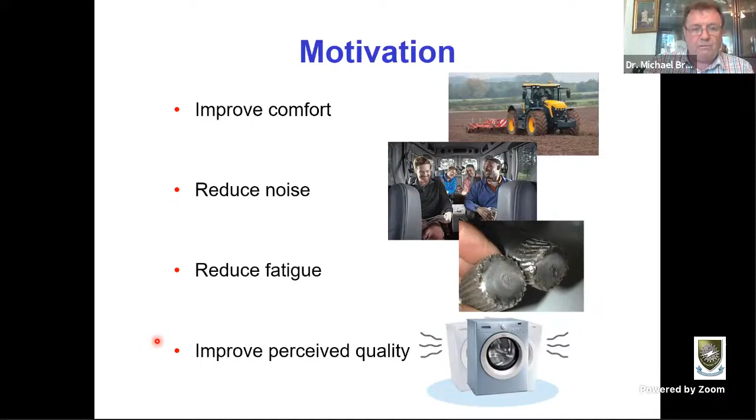So what am I going to do today? I'm going to give a very brief overview of some basics, and then I'll talk about ways to reduce vibration, and I will give examples as I go along.

Now, the best solution is to control the vibration at source, but this is not always possible, and for many, many years, this was never even undertaken. It has, however, now become a target for high-tech companies - for example, Rolls-Royce, the high-tech companies from Korea, and so on - they employ engineers now to get involved at the design stage to try to reduce the vibration at source.

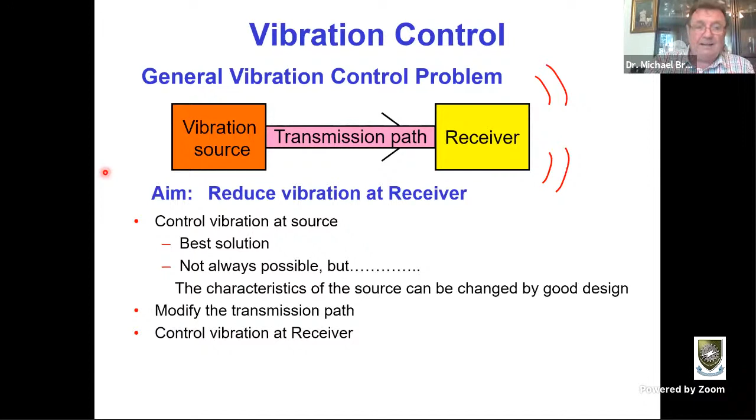By far the most popular method of controlling vibration is to control the transmission path, and you will all have seen examples of this, and I'll show you some in the coming slides. You could also try to control vibration at the receiver - that is sometimes done.

But what I'd like you to remember is that in all of these things, in general, the only thing that you can do is control the mass, the stiffness, and the damping - both the amount and the distribution of these three quantities. So the problem is quite easy to state, and in some sense, it's quite easy to state the solution.

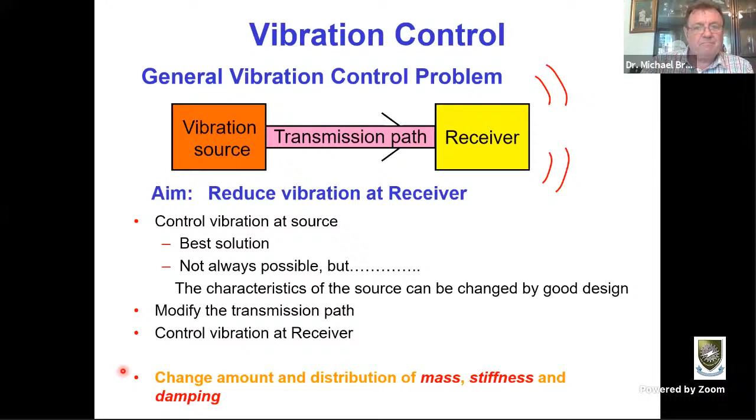However, it's very difficult to know how to change the mass, how to change the stiffness, and how to change the damping, and more importantly, when to change them. So let me just start off with some basics.

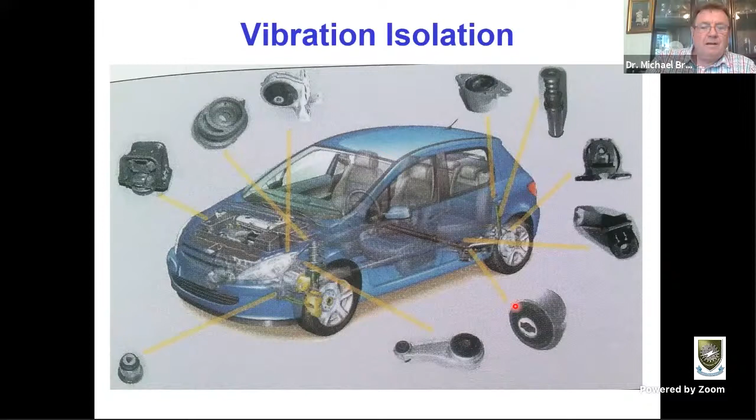I'll talk a little bit more about that, but in principle what we do with vibration isolation is interrupt this transmission path so that it's more difficult for the vibration to transmit through to the receiver.

Here is a picture of part of a car, and you'll be familiar with the suspension system, where you get these large coil springs. But what perhaps you're not so aware of is that all of these little joints are rubber bushes, designed to act as vibration isolators. So wherever you can in a mechanical system, it is always good to insert a resilient element between two stiff components in order to give some vibration isolation.

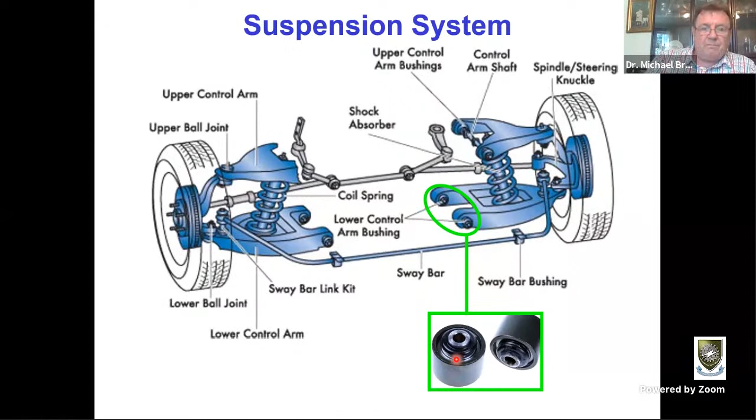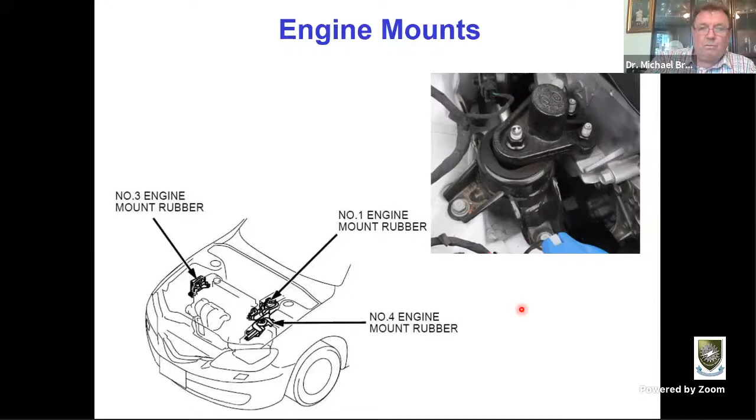The whole idea of this is to make sure that the engine and exhaust system are not rigidly connected to the car. In a sense, what you do with vibration isolation is let the source vibrate. You do not try to stop the source from vibrating, but you try to stop that vibration being transmitted to an important part, which in this case is the rest of the car.

So I just want to go through a really brief example here. There's a small amount of mathematics, but not very much.

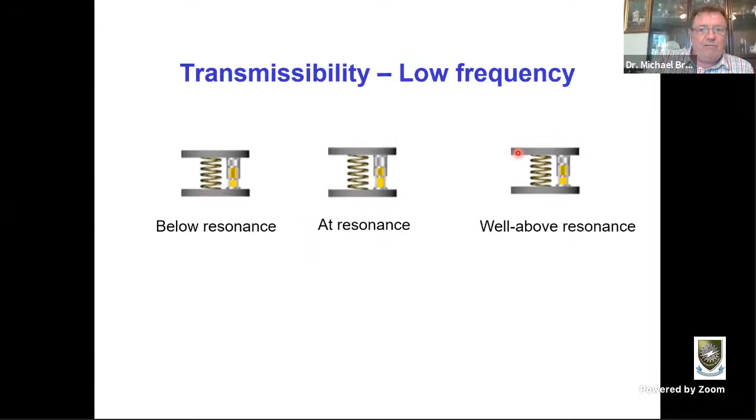Here you can see that the base moves a lot, but above the isolator it does not move very much at all. If we excite the system with random excitation, you can see you get a little bit of motion here, but you still get quite good vibration isolation.

Next time you're in a car, I suggest you look at a car or truck passing you, and if you look at its wheel and the body of the car, you will see that it behaves exactly like this.

So, some different isolator configurations.

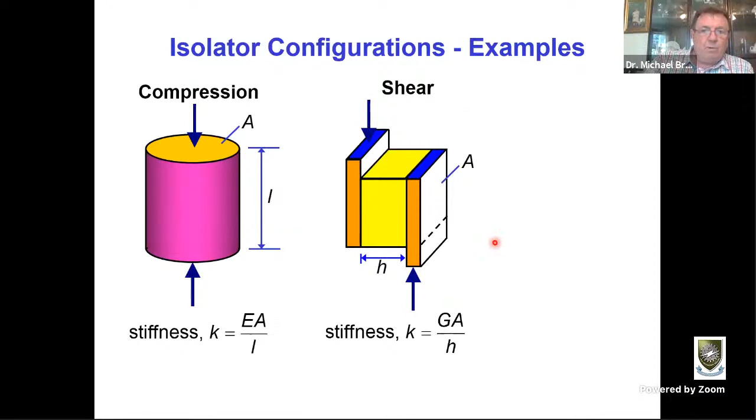But so often you find that they're configured in shear so that you can get more compact isolators. The shear stiffness is a function of the shear modulus, and the shear modulus is related to the Young's modulus through Poisson's ratio.

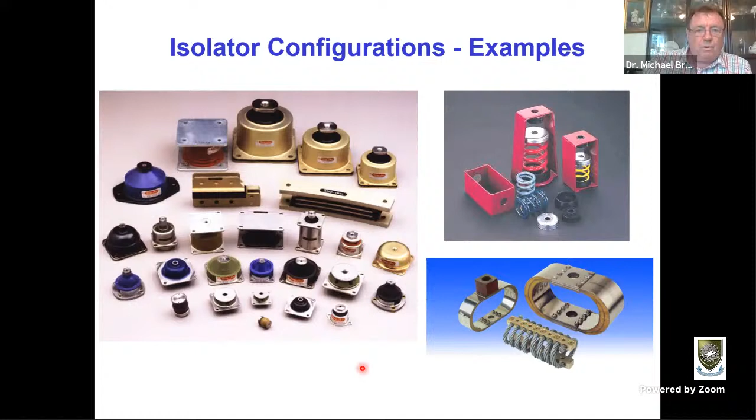So that's vibration isolation. That is one way of controlling vibration and disconnecting your source from your receiver. So let's turn now to a second way of controlling vibration, that using vibration absorbers.

Again, if I take a car as an example, if you were to look inside a car, you would find there are many vibration absorbers. Here are, in fact, 7 of them. There's one on the backrest, there's one on the steering wheel, there's some in the hydraulic system, there's some on brakes, they can be internal tubes, they can be torsional vibration absorbers and on the engine, and I'll talk about that a little bit more in detail.

And then in some advanced cars, you will get some quite sophisticated active vibration absorbers.

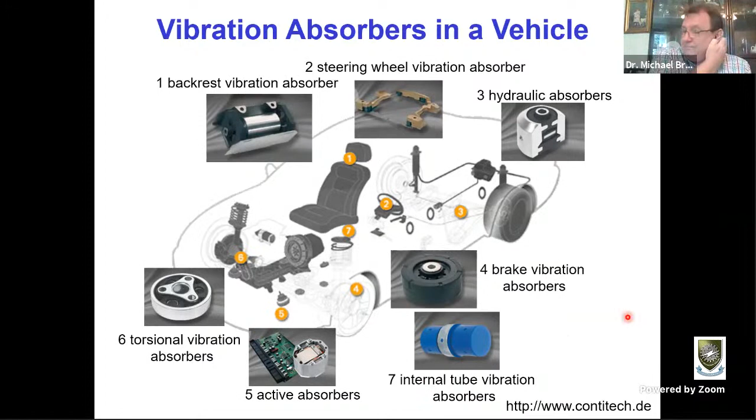Now we can tune this depending upon the properties of the system, so we can make this what they call a tuned vibration absorber. A lot of engineers will spend time designing these things to combat specific vibration problems.

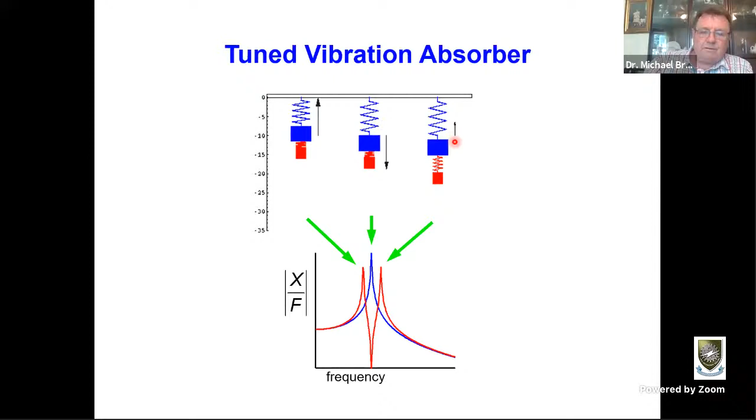There has to be a phase shift occurring between this natural frequency and this natural frequency. So when the phase shift occurs, it moves from being negative to being positive. It has to pass through zero. And this zero here is what we're looking for in a vibration absorber.

If we put some damping into the system now, we can no longer bring this mass to rest. The reason we can't do that is because the force acting on the mass is no longer equal and opposite to the excitation force. The damper destroys that phase relationship. And so we will get a certain amount of motion of our main system.

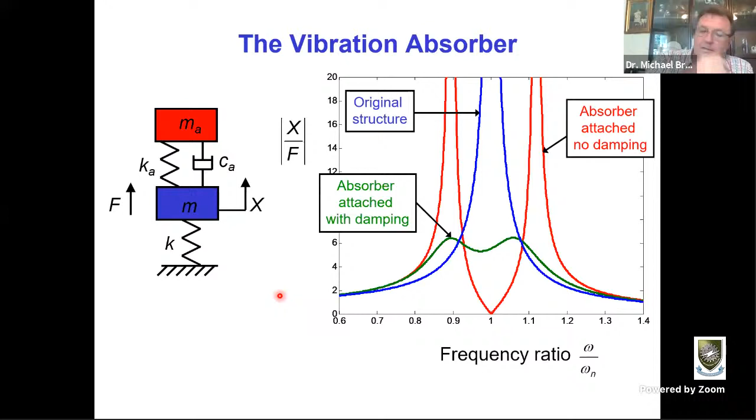Often with a vibration absorber, we're trying to get a fairly smooth but low frequency response rather than these large peaks that you get. So damping, in fact, is quite a good thing to have.

The very first vibration absorber appeared in 1910, slightly more than 100 years ago, and it was a device to stop the rocking motion of a ship. You can see here there's water, and the water passes through this valve here, and as the water moves backwards and forwards, if it's tuned correctly, it can suppress the rolling motion of the ship.

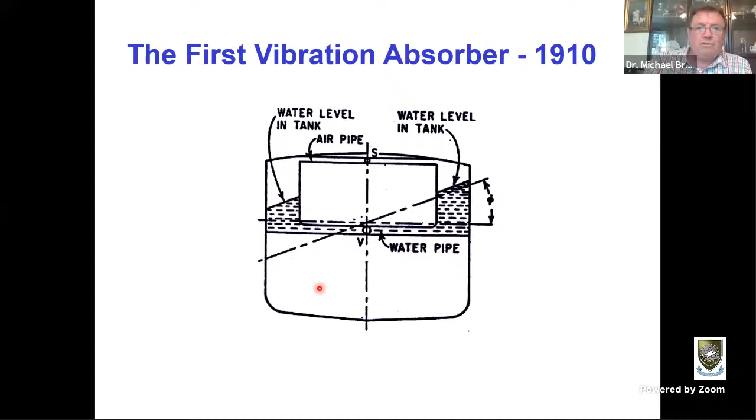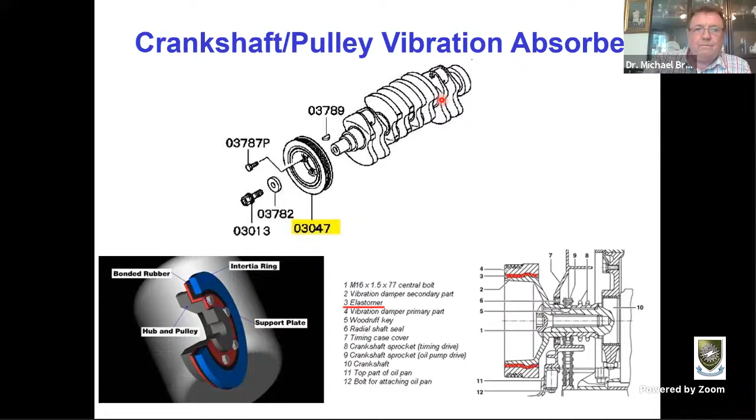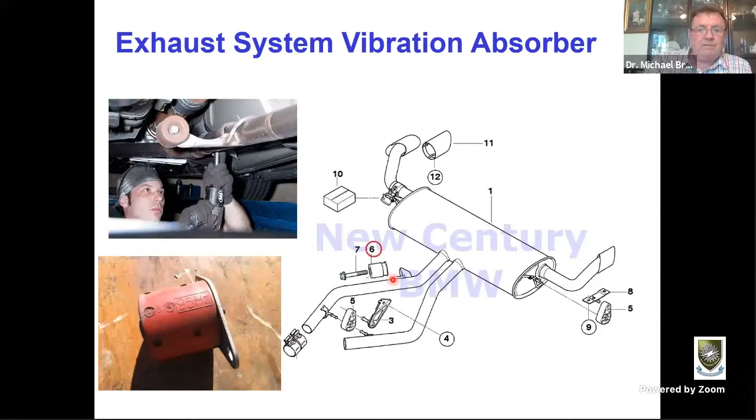So this is a bit like a positive feedback system, but it doesn't act in a good sense. So what the designers had to do was get some damping into this system without changing the design of the bridge.

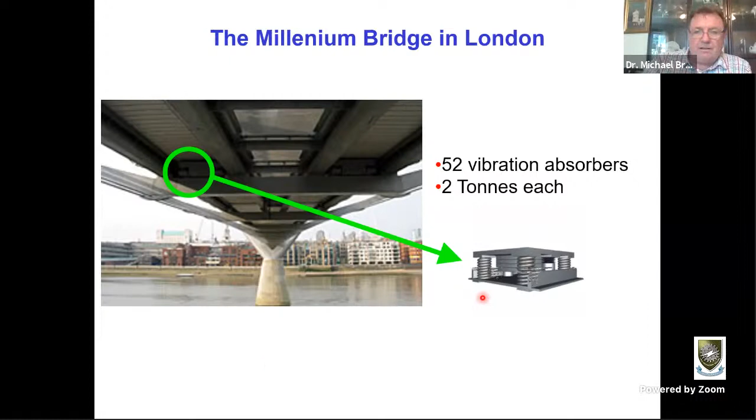And they came up with a design where underneath of the bridge on all of these frames, they put a vibration absorber, which is like a mass and a spring. If you ever go to London and you cross this bridge, it goes from St. Paul's across the Thames to the Tate Gallery, the Tate Modern. And if you look underneath, you'll see these. They're not particularly attractive things, but they do the job.

If you look at a set of pylons that carry electricity, you'll notice at the ends these funny sausage-type devices. These are vibration absorbers, designed to operate in that way I mentioned, to get some damping into these cables. These are called Stockbridge dampers.

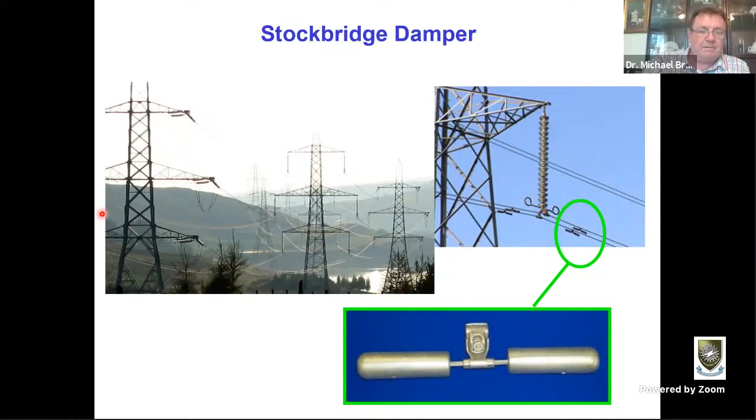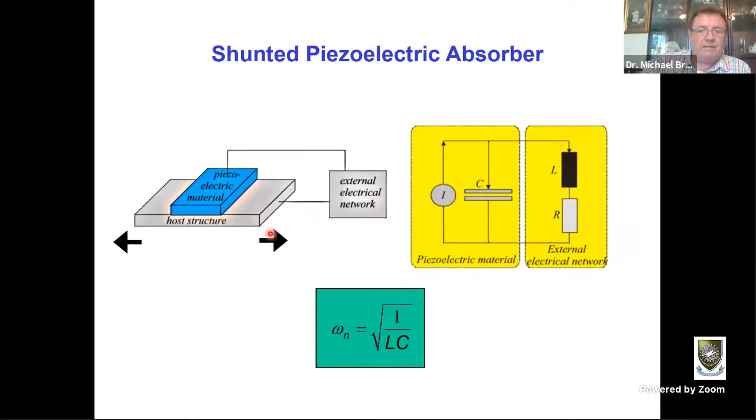So here's a very small vibration absorber. This is the last example, where we have an electrical resonator. The electrical resonator is an inductor and a resistor, and we can connect to the main structure through a piezoelectric material, which acts as a capacitor. So because we have a capacitor and an inductor, we can get a resonance, and this can be used to put forces back onto the structure again, generated from the electrical system.

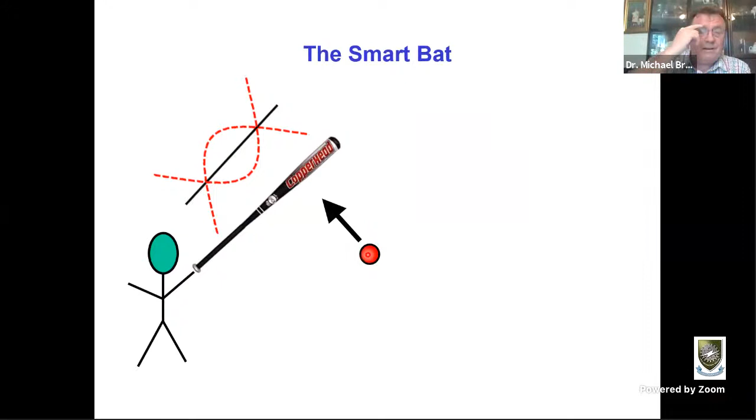Here's an example: a baseball bat. Cricket bats, by the way, do the same thing. This will have a mode of vibration, and the mode will look like this, the first mode. If the ball hits at this point, we do not create a lot of vibration - this is called the sweet spot. However, if the ball hits the end, the bat will vibrate a lot, and you get a sore hand, and the ball doesn't go very far. I'm sure quite a few of you will have experienced both of these situations in cricket.

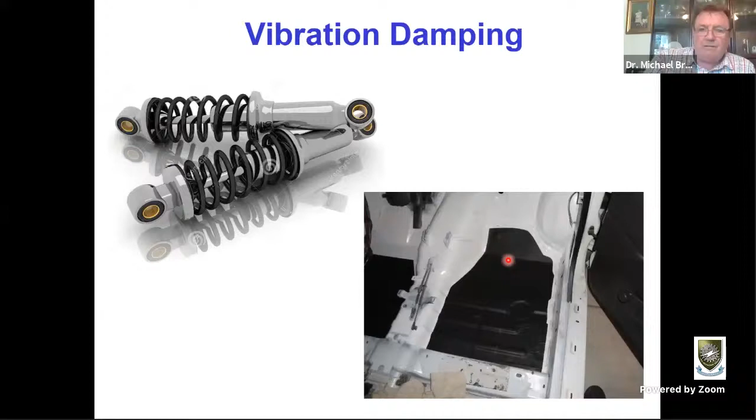Onto the final topic briefly - this is not a large topic. This is vibration damping, another way of controlling vibration. You'll be familiar with these spring damper systems, suspension units, which you get on motorbikes and cars and so on. But if you were to take up the carpets in a car, you would see lots of material like this, and this is also damping material.

The automotive suspension system, if you look inside it, consists of a piston, and as this piston moves backwards and forwards, oil moves from side to side, and it is this that causes the viscous damping. If you look at the ends, you'll also see some rubber here, and this rubber is acting as an isolator, but there's also some damping within the rubber itself.

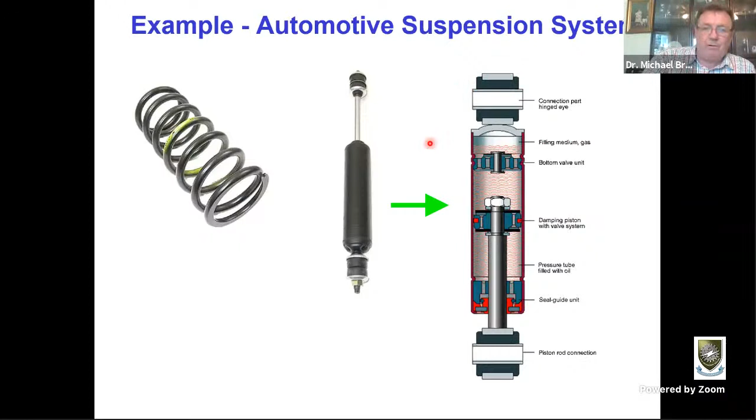That's the effect of damping on free vibration. In terms of forced vibration, we saw at the beginning that it controls vibration around the resonance frequency. So damping is only effective at controlling the response around resonance. You'll hear a lot of people talk about dampening down vibration, but what they actually mean in many cases is reducing vibration, because damping is only a specific type of vibration control measure which acts around this frequency.

By far the largest amount of damping put into structures is through added damping using viscoelastic materials. Again, looking at the inside of a car, you'll see materials like this, and these are gaskets. Nowadays, when people design a gasket for its primary purpose, which is to act as a sealant, they will also build in damping properties to suppress vibration.

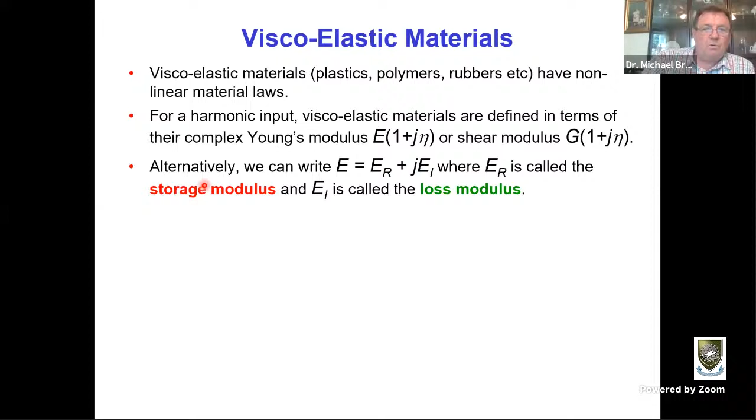Sometimes this is expanded out, so for example we get the real part of E and then the imaginary part of E. The real part is sometimes called the storage modulus, and the imaginary part is called the loss modulus. For the younger members of the class who've just learned about stress and strain, and Young's modulus and how they're related, you will only probably have encountered the storage modulus. It's only when you start to look at dynamics that this loss modulus becomes important.

So we have this Young's modulus, the shear modulus, and the loss factor - important properties in terms of vibration, but they're complicated. They depend on frequency, they depend on temperature, they depend on the amplitude of vibration, and they depend upon the preload. So what can look like a really simple thing, like some viscoelastic material, can behave in a very complicated way, and in order to predict it you need quite sophisticated tools.

You will know the frequency and temperature dependence of these materials. You'll know, for example, if you take some rubber and it's very cold, it feels stiff, but as it becomes warmer, it appears softer.

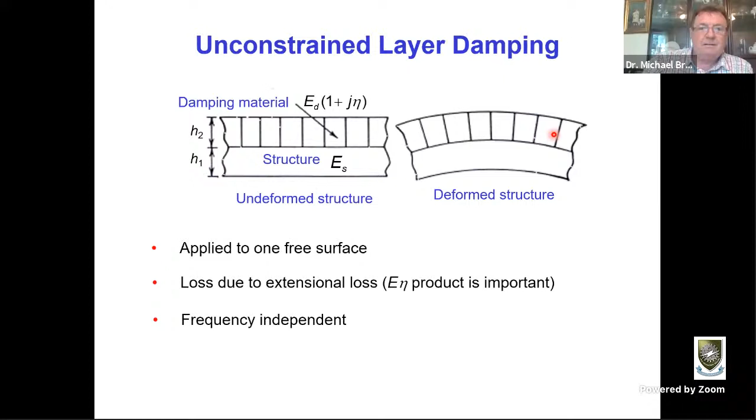There are two fundamental mechanisms for putting a material onto structures. One is what we call unconstrained layer damping, where we simply layer on the material, and as the structure bends, you can see that the material stretches, and as it stretches, it will dissipate energy.

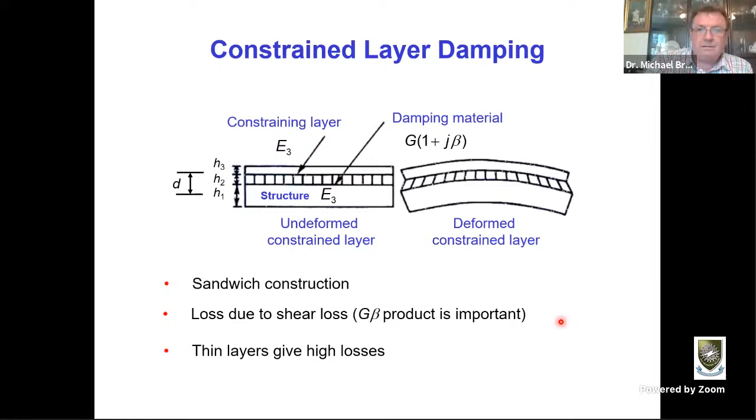Then we've got this other type where we put on a constraining layer, a stiff layer. The effect this has is it forces the damping material to strain, to shear. So it's the shear stiffness of the damping material which is important in this configuration. In order to get large shear stresses in the material, we tend to have very thin layers, whereas with the other type of damping, the layers tend to be larger.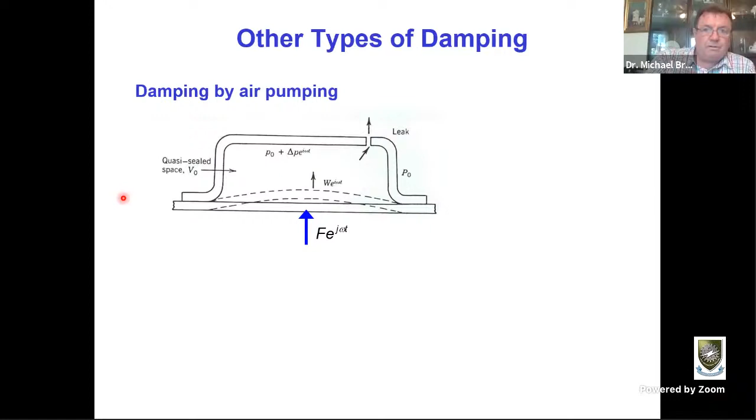Along joints, for example, you can see it here. You get small amounts of air moving backwards and forwards, perhaps a little bit of friction as well, and all of this creates a little bit of damping into a structure.

If you've got a bolted structure, then the amount of damping you get is much greater than if you've got a welded structure, because you will get micro movements with bolted and riveted structures, whereas with welded structures that tends not to be the case.

Finally, here's an interesting application of just using a thin layer of air. What we have here is the main plate, and then we attach a thin plate to the main plate, loosely connected with these bolts, and in between is a really thin layer of air.

This is microscopic. As this vibrates, if the main plate and the attached plate have different thicknesses, you get different wavelengths, different deformations at certain frequencies, and that causes the air in here to be pumped backwards and forwards, and that pumping of the air creates a damping effect.

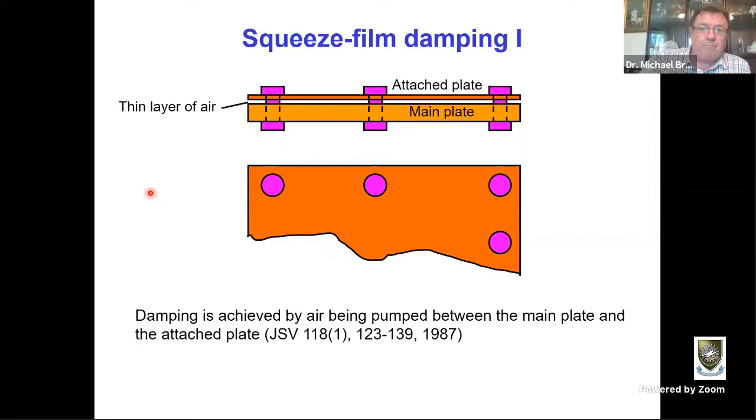This type of damping is used sometimes on ships when they want to damp a deck and they can't use damping materials for that. Finally, here's something we will remember from last year, perhaps: airplanes.

So that is it, I'm afraid. A very quick tour around different ways of controlling vibration. I've basically highlighted three ways of doing it: vibration isolation, vibration absorbers, and vibration damping. Hopefully the examples I've given will help you to visualize the main principles.

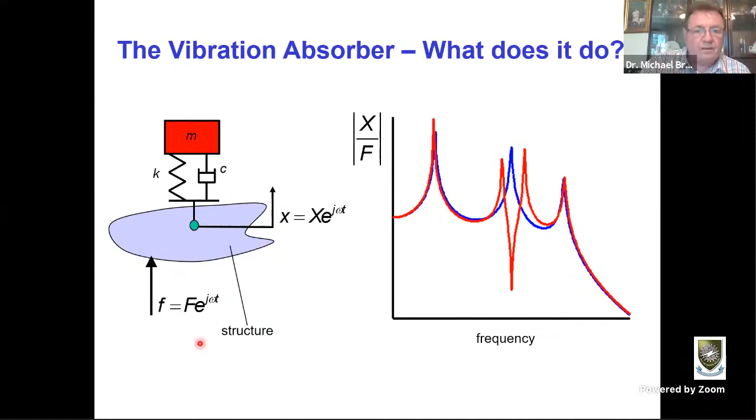Damping, we know. Oh, very well, yes. I understand the problem. Nice, let me just go back perhaps to a...

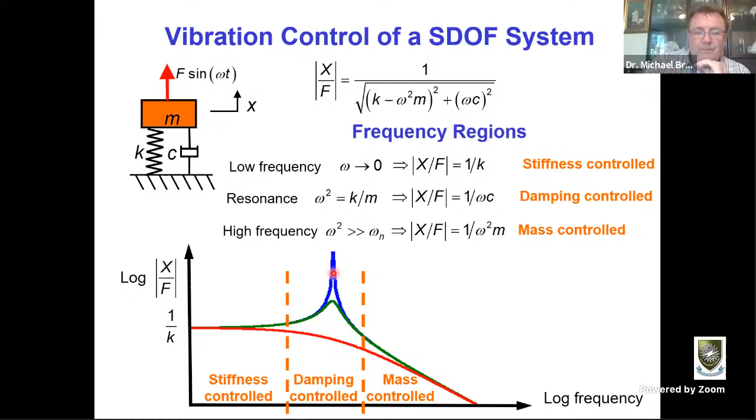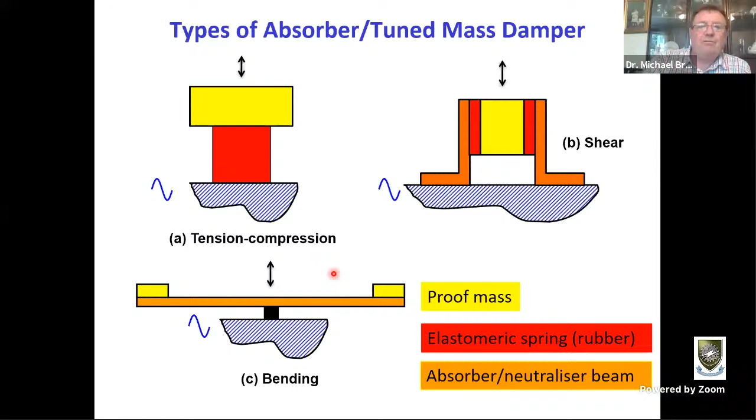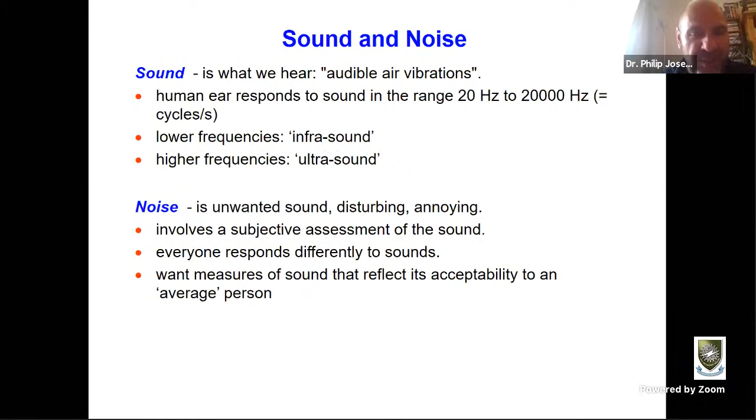So before we talk about what sound actually is, let's think about what it is in a very general sense. Sound is a very small time-varying fluctuation of the density. We know that if there is no sound, the ambient density in space is about 1.2 kilograms per cubic meter. And when you make sound, there's a very, very tiny perturbation of that density.

Equally, sound can be thought of as a fluctuating pressure. Ambient pressure, atmospheric pressure, is about 10 to the 5 pascals. When you make sound, even very loud sound, you're perturbing that pressure by a very, very small amount. We'll talk about those levels in a moment. But we usually measure sound pressure rather than density, because sound pressure is very easy to measure with a microphone. Most sound pressures are typically less than about 1 pascal.

Oh, I think there's a baby.

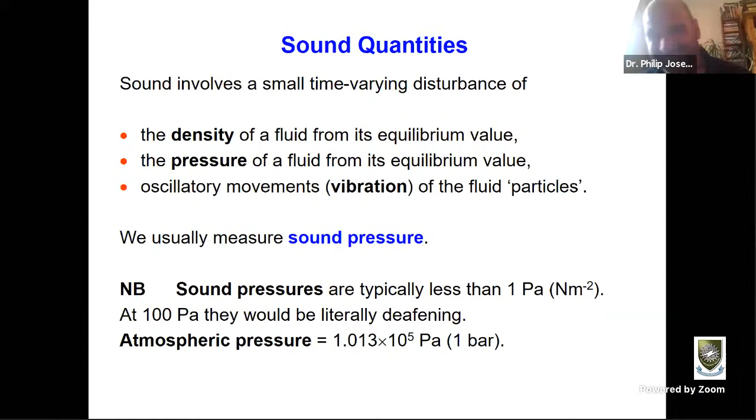Okay, so sound is a wave phenomenon. If you clap your hands, or make sounds, what you're doing is squashing the fluid. But that fluid doesn't like to be squashed, so it expands again, and it overshoots, and then it compresses again. And so a wave is set up which propagates through the air at the speed of sound, which is about 340 meters per second.

So sound, like vibration, is a wave phenomenon. Now, Mike Brennan talked about waves on beams and plates. These are transverse waves, meaning the motion is 90 degrees to the direction of propagation. Whereas sound is a longitudinal motion, as we'll see in an animation in a moment - with sound, the particle motion is in the same direction as propagation. Another important concept about waves you need to understand is that there is no transfer of mass.

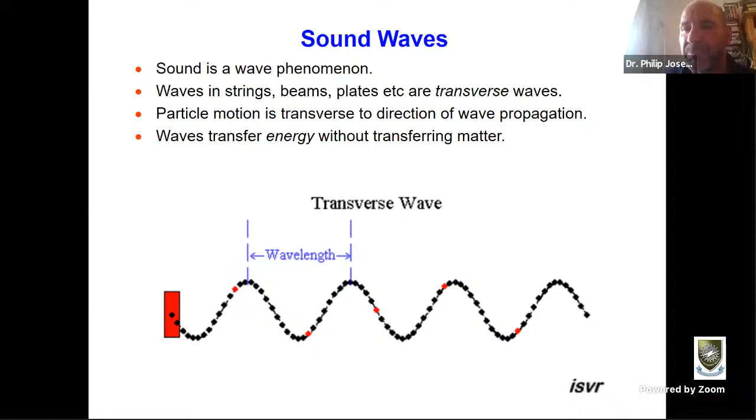No transfer of mass with a sound wave. So if you generate a sound wave by making some noise, you generate a pressure fluctuation which propagates through space, but you are not transferring any matter. This next animation hopefully will explain that more clearly. This is a very, very simple example of one-dimensional sound. What I'm showing here is an infinite tube with rigid walls, so there's no motion of the walls.

Now what I'm doing is exciting that fluid with a piston - you can see that red plane piston source. So I'm generating one-dimensional sound, where the acoustic pressure is only varying axially along that tube, not in the transverse direction. As that piston moves in, you're compressing the fluid, and the reason you can do that is because the fluid is compressible. You can squeeze a fluid.

And if you want some evidence of that, take a bicycle pump, close the end, and just push down on the top - you can squeeze that air. So the air has a stiffness, it has compressibility. But the reason the fluid doesn't get away very quickly is because it has inertia, it has mass as well. So when the piston moves in, you're compressing the fluid, and that compression propagates down the tube at the speed of sound.

But more fundamentally, in some ways, what is happening is that you're exciting small particles in the fluid. If you imagine a very, very small volume of fluid - much, much smaller than the wavelength, but much, much larger than the size of a molecule - I've shown some of these in red.

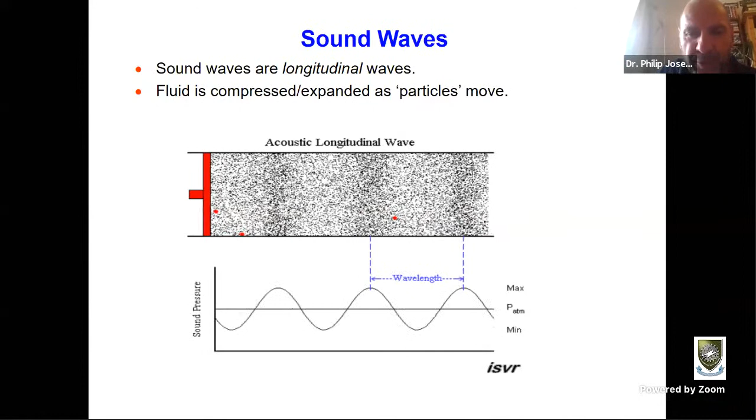So we have two velocities in this problem. We have the speed with which the disturbance travels down the tube, and that's the speed of sound, about 340 meters per second. And then we have the speed of the particles, which is much, much lower, typically at millimeters per second. So it's important to understand those two concepts.

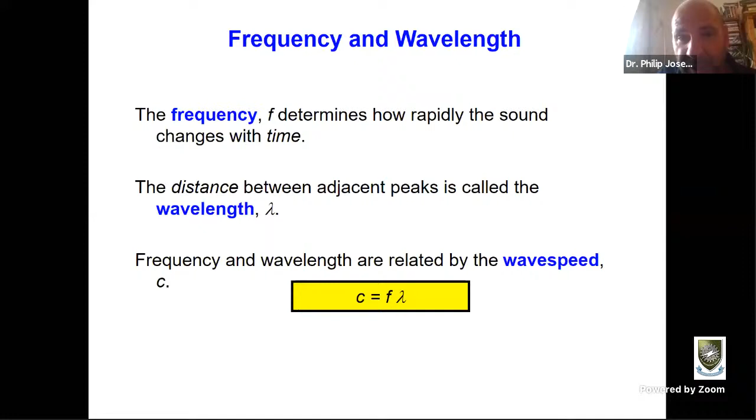Now, I'm sure you're familiar with these equations. These equations apply in vibrations as well as sound. In acoustics and in waves generally, we describe the frequency, which tells you how rapidly the sound varies with time - in particular, how rapidly a single frequency wave changes with time. Associated with that is a wavelength, the distance between adjacent peaks or troughs. And I'm sure you've come across this expression before: it's very easy to show that the wave speed is the frequency times the wavelength.

And another example of that is where you have the same wave speed - for example, it could be sound in air - but you have different frequencies. The example on the right is a much higher frequency compared to the example on the left, and that generates a smaller wavelength sound. So again, this is another example of C equals F lambda, a result which applies equally to vibrations as it does to acoustics.

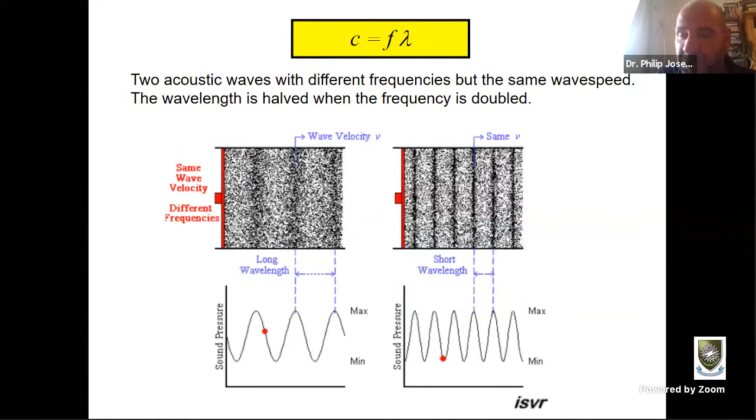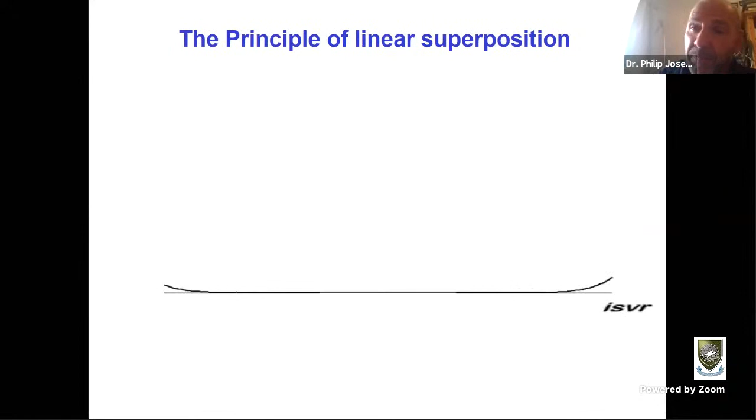Another important quantity, valid in sound and vibration, is this idea of linear superposition. Most people instinctively understand the idea of linear superposition, but I think it's actually quite a subtle concept. It's the idea that if you have two waves occurring simultaneously, then the resultant disturbance is simply the sum of the waves individually. The reason this is true is because the governing equations which govern the propagation of sound are linear equations. That means that if P1 is a solution of our wave equation and P2 is a solution of our wave equation, then P1 plus P2 is a solution of our wave equation.

Now, this is only true because our equations are linear and because the amplitudes of the acoustic pressure are generally much, much smaller than, say, the ambient pressure. At very much higher amplitudes, say inside a jet engine, where the fluctuating compression can easily be as high as atmospheric pressure, these linear equations break down and linear superposition no longer applies.

Now, what happens if you have sound inside of a closed pipe? Here is a very simple example of a rigid walled pipe, showing sound propagating inside that pipe. There's a wave propagating from left to right with an amplitude of A1, and that reflects from the end on the right with an amplitude of A2. Because we have rigid walls at the end of the pipe, the velocity there is zero - the particle velocity is zero.

What we find in this example is that if you generate sound in a closed pipe like that, which has got a length of L, then you set up acoustic resonances. Mike Brennan talked about the concept of resonance earlier in his talk on vibrations. What we find in this case is that you have resonances occurring when you can fit an integer number of half wavelengths exactly inside the length of the pipe - so half, 1, 1.5, 2, 2.5. When you can fit exactly an integer number of half wavelengths inside the pipe, the sound bounces back and forward and gets bigger and bigger and bigger.

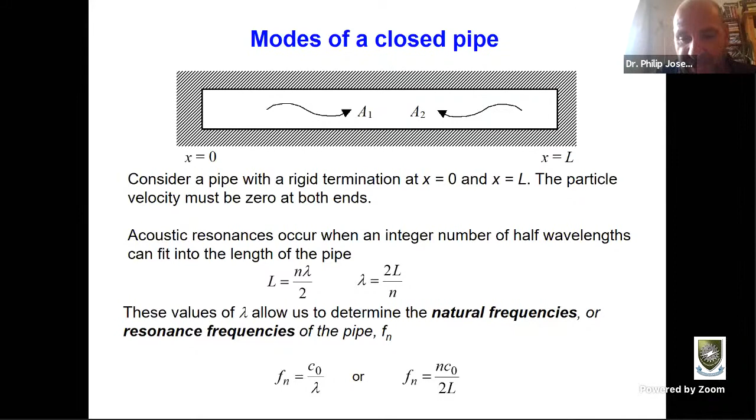Nothing else will change, nothing else will affect it. You have to absorb the sound at the resonance kind of frequency. So from that condition, lambda equals 2L over N, you can calculate the resonance frequencies for these simple one-dimensional cases, as N times the speed of sound divided by 2L.

Here's a kind of interpretation of that. You can think about these modes, or we sometimes call them standing waves for reasons I'll explain in a moment, as being the superposition of two propagating waves. So if you look at the example on the right, this is an example of a standing wave or a mode.

If you can see the variation of the pressure with time, it looks like it's standing. The nodes, the positions of zero pressure and the maximum pressure, don't change with time. It looks like it's a standing wave. And you can decompose that in terms of a propagating wave on the left and a propagating wave in the middle.

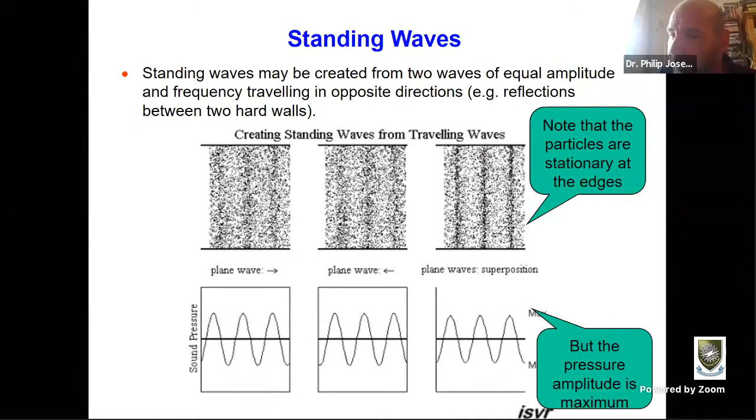And we call that a standing wave. You'll notice from the animation that the particle velocity at the edges is kind of zero. But what is interesting is that the acoustic pressure, the sound pressure, is a maximum at those edges where the particle velocity is kind of zero.

Now things get slightly more interesting when you have a closed-open pipe. This is sometimes called an organ pipe. So now what you have is a closed end on the left and an open end on the right. And so you have a system of waves going from left to right, and then you also have a reflection from the open end.

Now, you may think that because it's open to the atmosphere, the sound will escape perfectly. That's not true, because there's a large change in impedance going from inside the pipe to outside the pipe, so sound will get reflected. And what you can show is that you also have resonances in this condition, but now the resonances occur when you can fit an odd number of quarter wavelengths in a distance L prime.

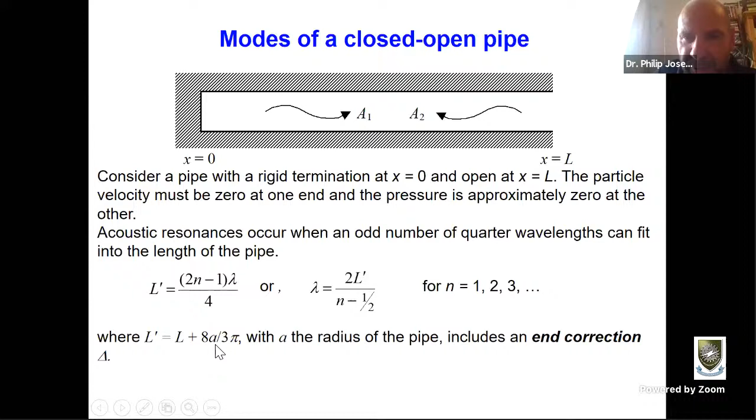Now L prime is the effective length of the pipe. And the effective length of the pipe is the actual length of the pipe. If you can see this equation here, the effective length is the actual length L plus what we call an end correction. Maybe this will be clearer if I show these pictures of the modes on this slide.

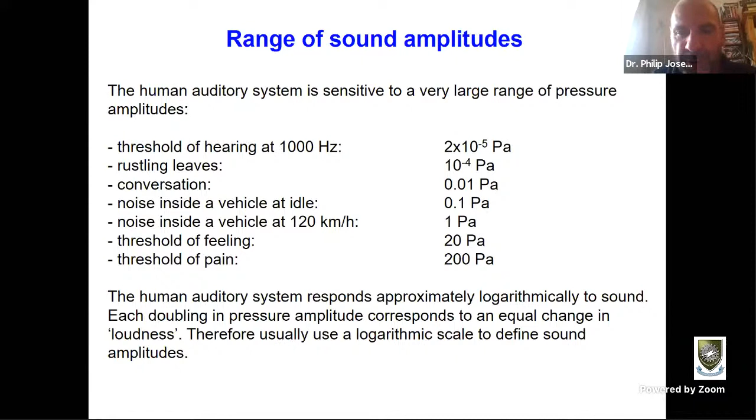So the interesting thing is that the range of acoustic pressures in nature is huge. If you look at this, it's about 7 or 8 orders of magnitude. So for this reason, our perception of sound is logarithmic. And for that reason, we don't measure sound generally in pascals, we measure it in decibels. What we do is collapse this range of pressures onto a logarithmic scale, and turn that into a decibel. I'm not going to say too much more about decibels in this lecture.

So far we've talked about sound as a fluctuating pressure which can propagate as a wave through space. But in many ways, a more fundamental way of thinking about sound is as a form of energy. Acoustics is a branch of physics, and physics is really about understanding various forms of energy. The important property about energy that pressure and density don't have is that it's a conserved quantity. You can't make energy go away, you can only change its form. And in noise control, as we'll see later on, we try to convert acoustic energy into heat energy, we try to dissipate it.

So there are two very important energy quantities in acoustics that I want to talk about. One is sound power, and the sound power is a measure of how much acoustic energy a source produces every second. We usually express that in terms of a decibel. So the sound power level is defined as 10 log 10 of the power of a source in watts, divided by some reference power. For reasons I won't explain today, we use a reference power of about a picowatt.

The sound power level of a source is extremely important because it allows you to compare the source strengths of different sources. If you have a big machine and a small machine, how do you compare the outputs of those different machines? You could measure the pressure, but that will change depending on the environment and where you measure it. Whereas the sound power is a single quantity which tells you about the total source strength, how much acoustic energy is radiated per second.

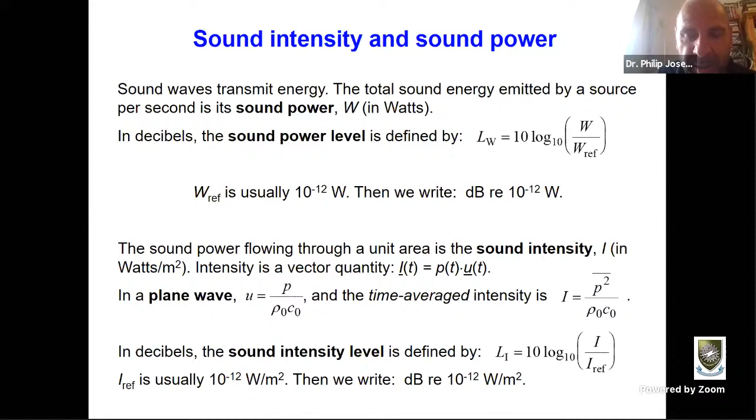A very important equation that we use a lot in acoustics is this one: for one-dimensional sound, like the one in the tube, the intensity—the flow of acoustic energy through unit area, unit time—is related to the mean square acoustic pressure divided by another important quantity in acoustics called rho c, the impedance of the air. That's the density times the speed of sound. If you go on to study acoustics or noise control, you'll see that rho c is very important in acoustics—it's really to do with the impedance that the wave sees as it propagates through space. I don't have time to say too much more about impedance.

So I'd like to finish off this basic survey of acoustics by talking about three-dimensional sound. Most sound obviously is not one-dimensional in a tube, it's three-dimensional. Here is a very simple example of three-dimensional sound: imagine you have a source of sound at very low frequency, where the source is much smaller than the acoustic wavelength.

And we call that a kind of a compact source or a point source. Generally sources like that radiate equally in all directions, and we call that omnidirectional radiation. So here is a kind of animation of that. We have a source in the center, and you can see these spherical waves being radiated out.

The acoustic pressure will decay as the wave spreads out spherically. In fact, you can show that the acoustic pressure decays as 1 over the radial distance from the center. You can see as well that the particle velocity is getting weaker and weaker as it spreads out from the center. Okay, so lastly, there's another very important result I just want to finish on. This is, for that very simple spherical radiation case...

Hopefully you can see that for the case where the radiation is equal in all directions, the intensity, which is the flow of energy through unit area and unit time, is simply the power divided by the surface area 4 pi r squared. We've also just seen that the intensity for a one-dimensional sound is just the mean square pressure divided by rho c. Very simply, what this tells us is that the mean square pressure varies as 1 over the square of the distance from the center. And this is the well-known inverse square law for light and sound, and for lots of other wave type systems.

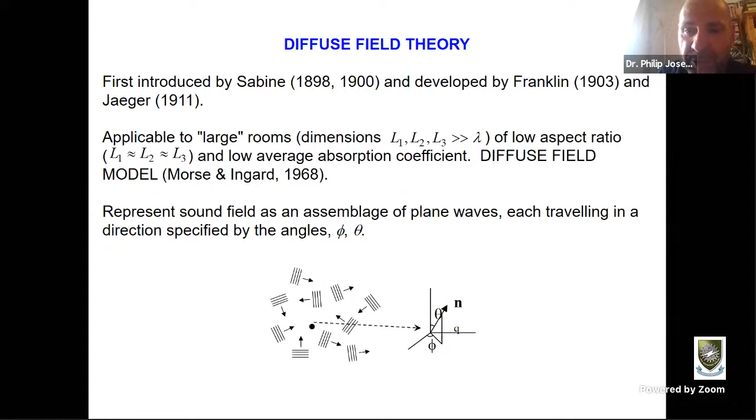And this is what I'm going to do now. So just like Mike, I've only got these one or two equations, but the reason for showing you these is that these are very powerful equations for arriving at very useful results. Now what I'm going to do now - this is called the energy balance equation. I'm going to introduce a sound source into my room, and then I'm going to look at where the energy goes.

So if I have a sound source inside of a room, where does the sound go? The rate at which sound energy goes into my room is the power of the source, which I'm calling W. The rate at which power goes in must equal the rate at which power is lost from the room plus the rate of change at which the energy changes inside the room. So the rate of energy in equals the rate of energy lost plus the time rate at which energy changes in the room. I'm going to go through this quite quickly.

The rate of energy going in is just the power of the source. The rate at which energy is lost from the room is simply what we'll call the intensity. The mean square pressure divided by 4 rho C, that's the intensity. This is the rate of energy flow through unit area and unit time in the room. So the rate of energy lost is that intensity multiplied by the equivalent absorbing area.

This is a very important idea in acoustics: replacing all the absorption in the room by an equivalent area that is perfectly absorbing, plus the time rate at which energy changes in the room. This expression in the square brackets is the total energy in the room, and d by dt of that just tells you the time rate at which that total energy changes.

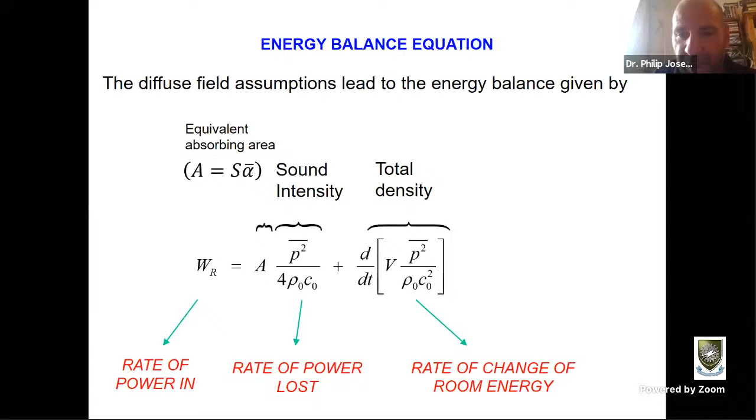So to summarize: we have A, the equivalent absorbing area. That expression there is the sound intensity, and that expression there is the total energy density. That's really all I wanted to say about that equation - a very important equation, but the reason for showing you that is that we can derive some very important results in acoustics. So the first solution I'm going to show you is the steady state solution.

Imagine you have a source of sound inside the room. When you turn it on, the sound level increases, but then very quickly it reaches steady state - there's a time at which the sound pressure no longer changes, and so the time rate of change of energy is 0. So under those conditions, we have an exact balance between the rate of energy going in, that's the power of the source, and the rate at which energy is lost from the room.

So we can equate these first two terms here, and this is an expression now for the mean square pressure inside of our room in terms of the power of our source and the absorbing area A, which you can quite easily measure. So that's the steady state solution.

And then the other solution I want to look at is the transient solution. Now what I'm going to do is turn my source off. So I have 0 on the left-hand side, and I get this first order differential equation. I can solve it for the mean square pressure. This tells me that if I make some sound inside of a room and I stop it - if I clap - this tells me that the pressure inside the room decays exponentially.

I can use this expression for the rate at which the pressure is decaying with time to derive something called the reverberation time. The reverberation time is the time taken for the sound to decay by 60 decibels. People working in acoustics use this result all of the time, and the reason this is so useful is that every room - could be a concert hall or a teaching room - has its own recommended range of reverberation times.

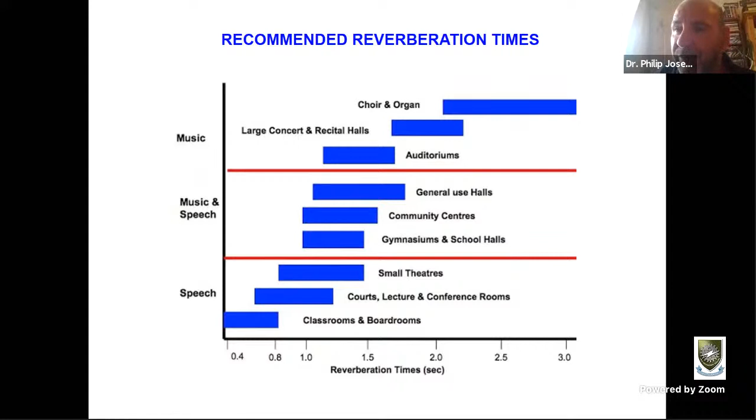So here are some reverberation times that are important to have. You can see we have classrooms and boardrooms, lecture rooms, small theatres, and these have got to have reverberation times of about 1 second. Inside general use halls, community centres, gymnasiums, the reverberation time generally has to be a bit larger. But then for Western concert halls, if you have organ music or choir music, large concert halls, the reverberation time tends to be a bit larger. So these reverberation times are very, very important for designing optimal listening spaces.

The other thing I wanted to talk about is that when you're listening to sound inside a room, some of the sound that you hear is radiated directly to your ear, and we call that the direct sound, and the rest of the sound is radiated by reflections from the walls, and we call this the reverberant sound.

Now I'll go through this quite quickly, so then we can modify our expression for the mean square pressure inside of our room in terms of the power. We're going to use this now to predict the reduction in sound level you get by changing the absorption. We can use this expression to calculate the reduction in the sound pressure level in decibels. Let's look at some examples.

Imagine you have a room with an average absorption coefficient of 0.2, which is quite small, so that's quite a reverberant room. And now we're going to increase it to 0.7. So we're starting off with quite a small absorption, we increase it to 0.7, and then you get a reduction of nearly 10 decibels, which is a large reduction.

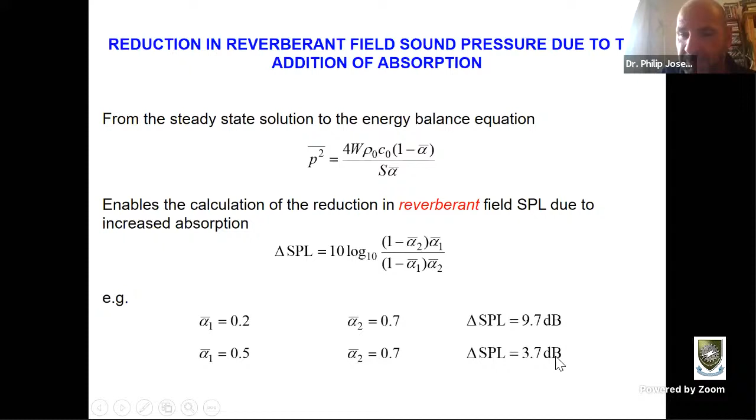But if your original absorption is higher, say 0.5, and then you increase it to 0.7, your sound pressure level reduction is much smaller. So adding absorption into a room is only really useful when the original absorption is quite low. And you can use this diffuse field theory to calculate the sound pressure levels in quite complex spaces.

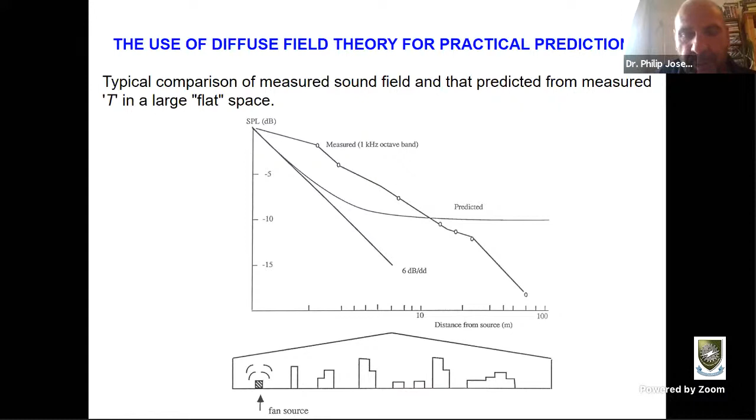Here is an example of trying to predict the sound pressure level in this factory. You can see there's a fan on the left and there's some various machines in there. And here is an attempt to predict the sound pressure level, and it matches generally quite well. I won't say too much about that because we're running out of time, but you can look at that for yourself. I'll distribute these slides if anybody's interested.

So it's a very powerful technique. The second concept I want to talk about is the idea of barriers. It's pretty obvious that if you put a solid barrier between a source and a receiver, then you get some reduction in the sound.

And there are two main mechanisms for that. One mechanism is that you block the direct propagation of sound through the barrier. Can you see the example on the right? These are some commercially available materials you can buy to block the sound. The one on the left gives a 60 dB block of sound because it's very thick, very dense. The one on the right is very thin, gives you a 17 dB reduction in sound.

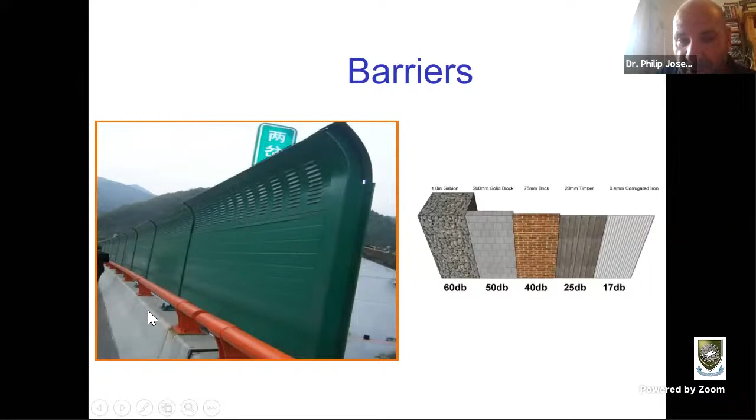So there are two mechanisms: one is that sound is absorbed, and the other is that sound, to get to the receiver, has got to pass over the top of the barrier to get to the ground.

So what I want to do now is just show some very simple predictions of that. Now I don't have time to go through the theory, but this is quite simple diffraction theory, and you can look at this for yourself if you're interested. I'm not going to say any more about it than that. It's very simple theory, but I just want to show some of the predictions from it.

Now what I'm showing here is a rigid screen, you can see it in that black line there, and I've got a wave coming from the top left to bottom right. You can see it propagating, and you can see three regions. You have this region, which I'm showing on my mouse here, where you have the interference between the direct sound and the reflected sound, so this is like a standing wave in there. And then you have this second region where the sound just continues.

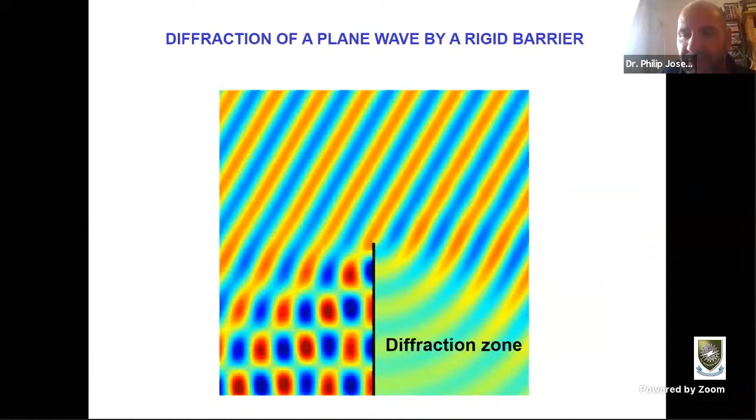But then you have this interesting region, we call this the diffraction zone, where the sound pressure is much weaker, because in order for sound to get into that region it must diffract around the barrier. There's no direct path. And there was some very fundamental, very interesting theory done by Maekawa, and he looked at how effectively these screens block sound.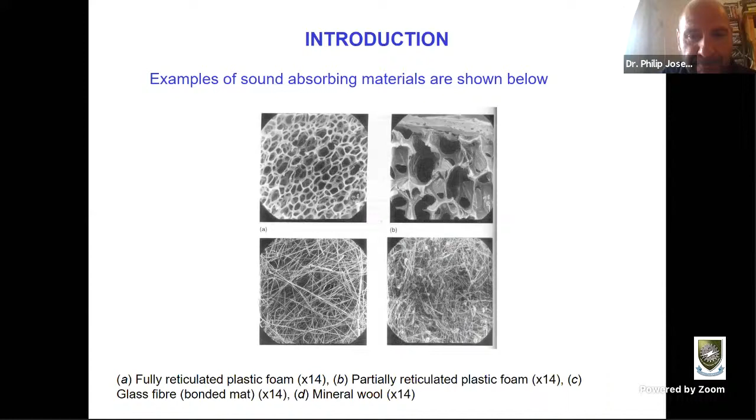Here are some examples of well-known sound absorbing materials - mineral wools or glass fibers. Absorbing materials are used a lot to control airborne sound which propagates through the air. We quantify the performance by measuring the absorption coefficient, defined in terms of energy - it's the ratio of the absorbed energy, actually intensity, to the incident energy. So an absorption coefficient of 1 means all of the energy is absorbed into heat, and 0 means none of it is absorbed.

Here are some very famous graphs done by a guy called Mechel in 1988. He measured the absorption coefficient alpha in percentage against frequency for lots of different rock wool type materials. They all had different density rho, and a different quantity called the flow resistance. The flow resistance is just the change in pressure divided by velocity - if you try to force flow through a material, it generates a pressure loss, which we call the flow resistance. That's probably one of the most important quantities for deciding how effectively these materials absorb sound. So you've got lots of materials with different density and different flow resistance.

But what Mechel did, which is genius really, is replot these figures against density times frequency divided by flow resistance. And all of these curves collapse - they all follow the same line. These are very thick materials - I'm not talking about the effect of thickness just yet. So for these very thick materials, you get these universal graphs shown.

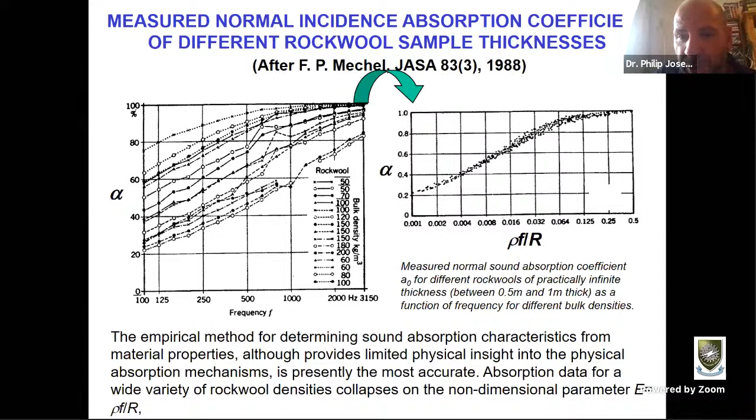I'll go through this quickly because I'm running out of time. Mechel also presented these very nice graphs of contours of absorption coefficient plotted against flow resistance and frequency. I'll let you read these for yourself, but if you want to design materials for optimal absorption, these graphs are very useful.

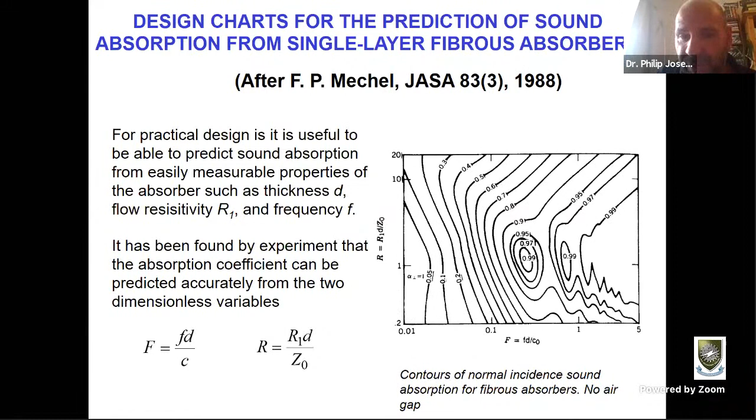I'll talk about sound absorption, looking at the effect of thickness.

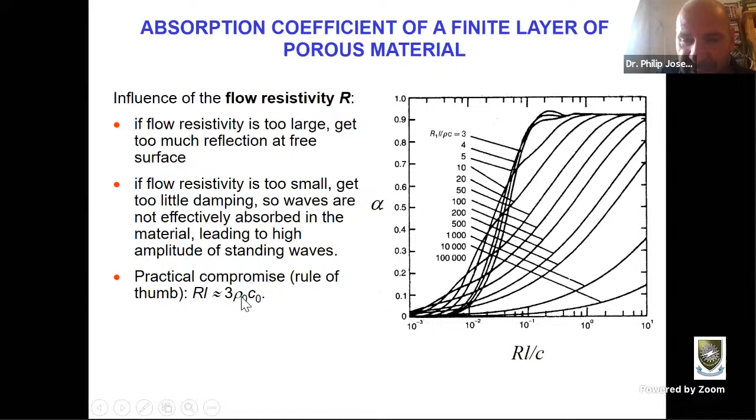Other results that Mechel derived - this is plotting the absorption coefficient against flow resistance multiplied by the thickness L of the material, divided by the speed of sound. What he showed was that the optimal performance of these materials was when the flow resistance times the thickness of the material was 3 times rho C. This is a very famous result that people working in acoustics use all the time. So if you want to design optimal absorption and you have a finite thickness L, you should arrange for its flow resistance multiplied by its thickness to be 3 times rho C.

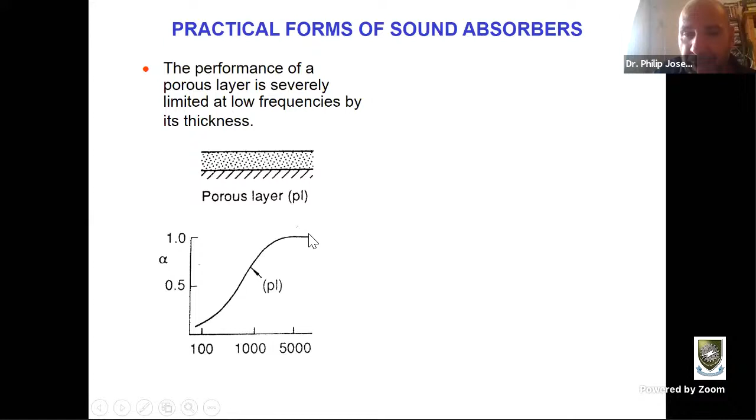But if you want to improve the low frequency performance, you can add a perforated sheet to the sound absorbing material, and people do this all the time. The sound absorbing material acts like a stiffness, and the perforated sheet acts like a mass, so you have a mass acting against a stiffness. This creates a resonance condition similar to what Mike Brennan described earlier, and you get maximum absorption at these resonance frequencies. If you shift the frequency of maximum performance down to lower frequency, you reduce the high frequency performance.

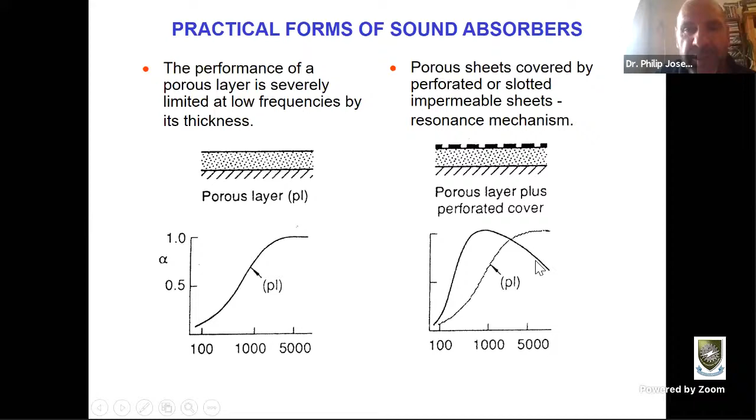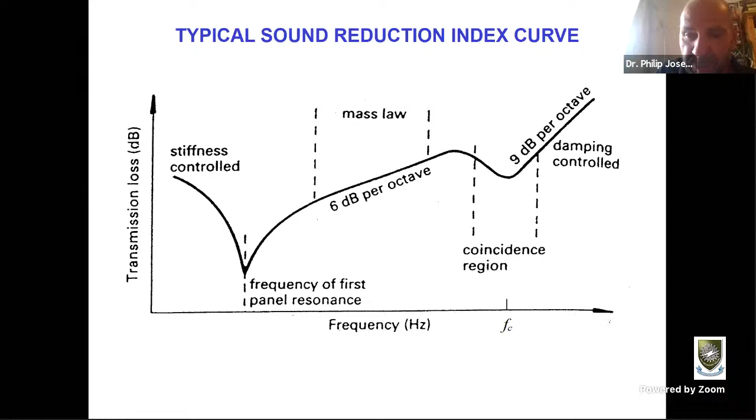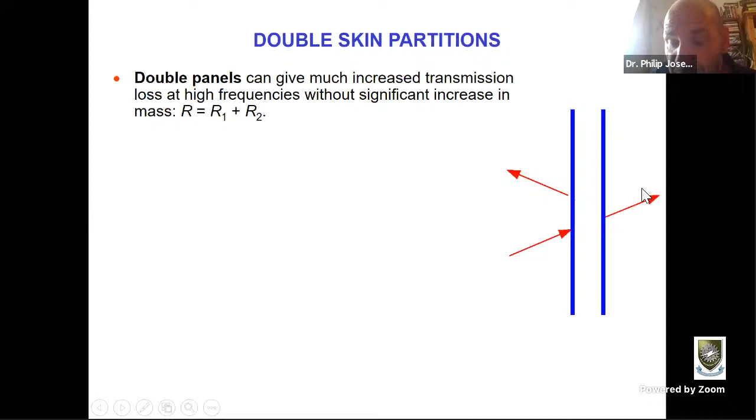Okay, so how can we improve on this? I'm nearly coming to the end. Another well-known technique for improving on the transmission loss of a single screen is to have a double screen, a double skin partition. Above a certain frequency, the transmission loss in decibels simply add. So if you have two screens, the first with a transmission loss of R1 and the second with R2, the combined transmission loss R is simply R1 plus R2. So if you have, say, 30 dB of reduction from the first one and 30 dB from the second, you get 60 decibels from the combined effect of having two together. That only occurs above a critical frequency F0, defined in terms of the mass surface densities mu1 and mu2.

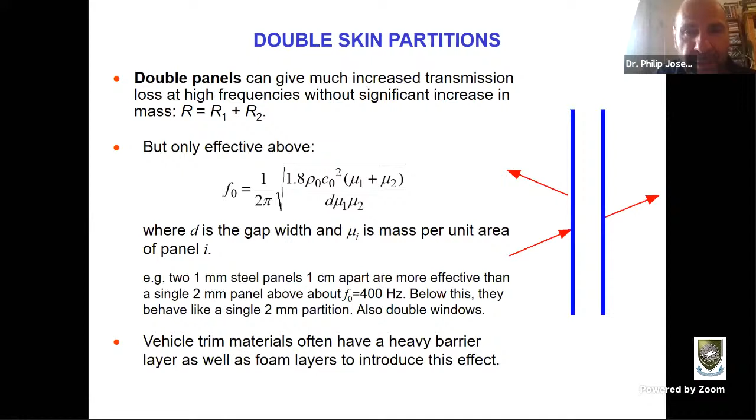Okay, so I think I'll finish off now talking about the effect of plate thickness. This is very important, because if you're designing a panel on a structure to reduce sound, there are two effects going on: one is that you're blocking the transmission of sound, but you're also exciting that panel to radiate sound.

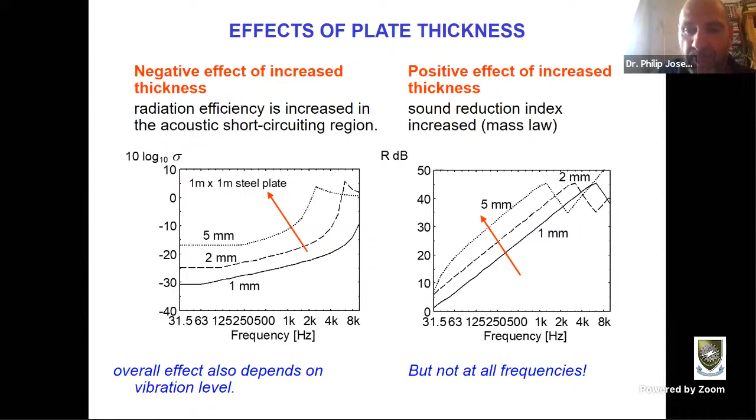As you increase the thickness of a plate, something bad happens: it becomes a much more efficient radiator of sound. But the good thing is that the transmission loss improves. So you've got to be very careful when designing these panels, because you might think you're blocking transmission more effectively, but you're also making these panels more efficient as radiators. When they're excited, they radiate more efficiently as a source of sound.